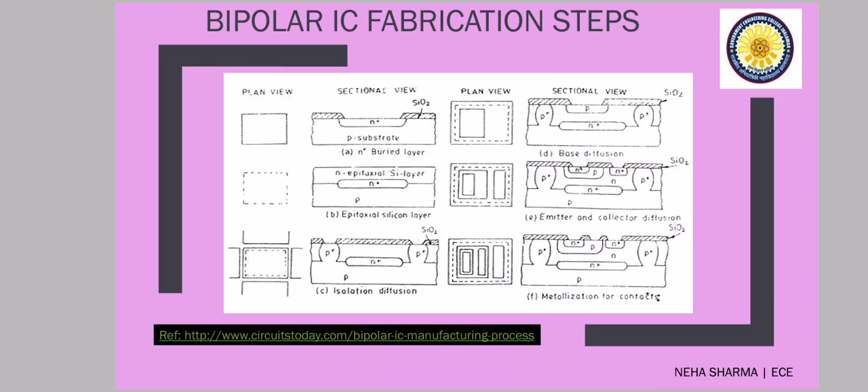So let's get started. This is a brief about the steps in bipolar IC fabrication, and I have taken this from the source Circuits Today. You can go through this website and get this information.

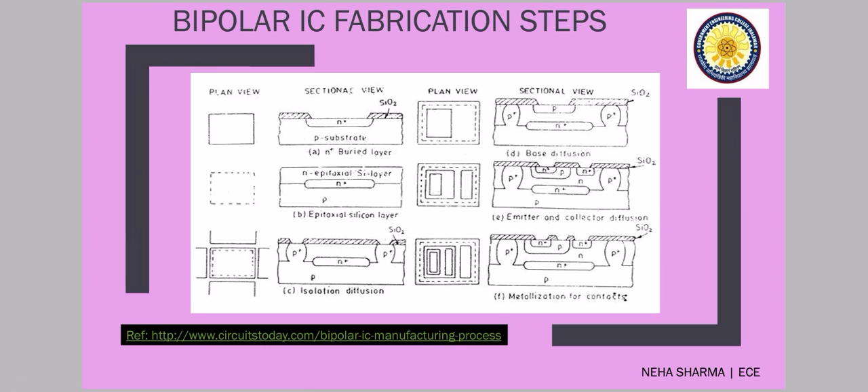You can see here it has a series of steps, starting with the p-type substrate, then buried layer, then epitaxial layer, then isolation diffusion. Here we are using junction isolation, then base diffusion, emitter, and finally metallization and passivation layer. We shall be discussing these steps in detail.

The first step is implantation of the buried layer. The starting material is a p-type single crystal silicon wafer, and on it a thin layer of SiO2 is formed. Silicon dioxide is formed on all surfaces of the p-type silicon wafer by exposing it to oxygen or water vapor in an electric furnace, meaning the oxidation process must be followed.

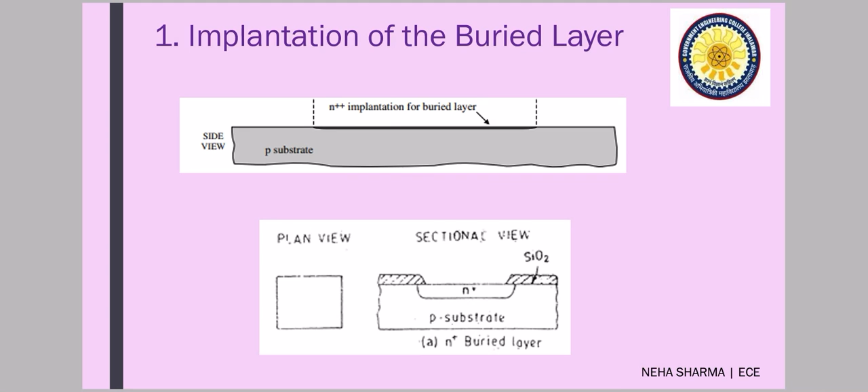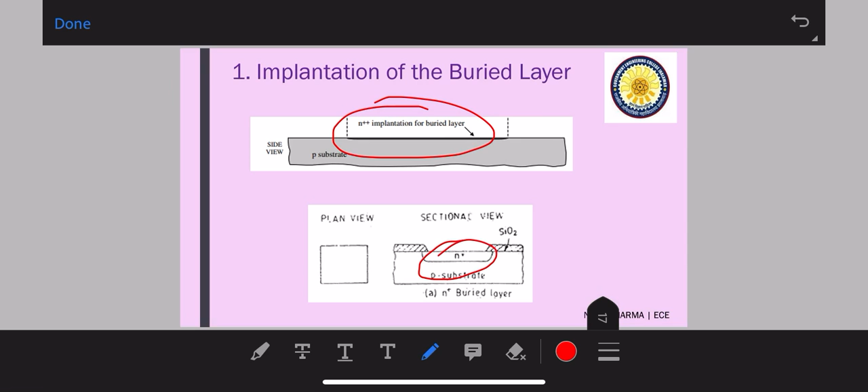The first masking step defines the area of the N plus buried layer. N plus means very highly doped buried layer, and this is also called the subcollector. As you can see in this diagram, this is the N plus buried layer, and it is very highly doped. The function of this layer is to reduce the collector resistance of the transistor.

The SiO2 is removed in these areas by chemical etching. Then thermal diffusion or ion implantation forms the desired heavily doped N-type, that is N plus buried layer region. The resulting structure is shown in the diagrams - I have given both the side view and the plan view.

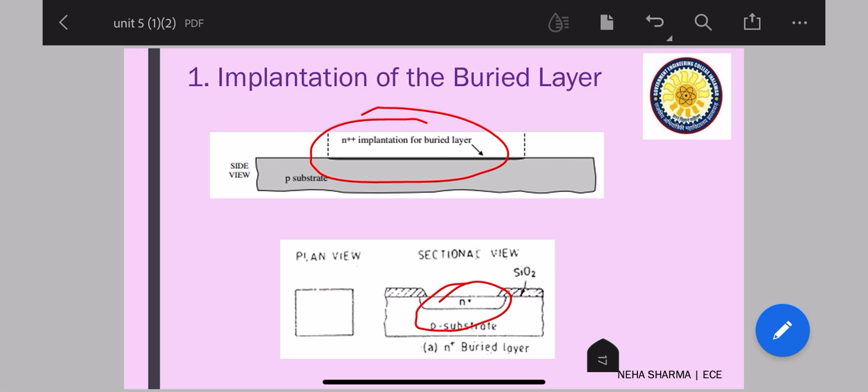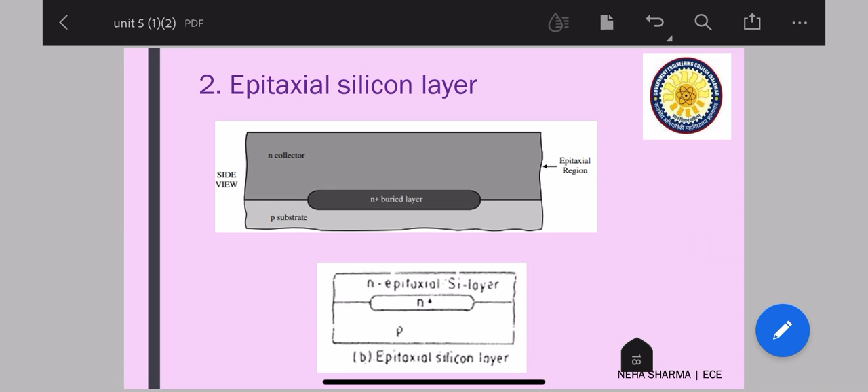In the next step, we go for the epitaxial process. The silicon dioxide masking layer is removed and the whole silicon area is exposed. By epitaxial deposition, an N-type layer is grown. This N-type layer is grown and is the epitaxial layer which will later become the collector of our BJT.

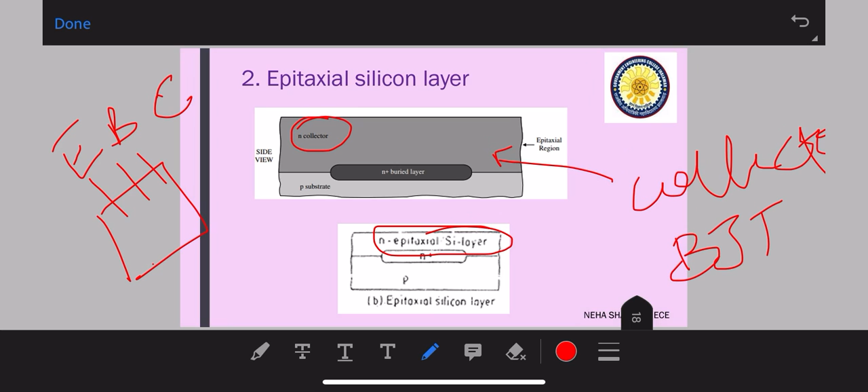In a BJT, as we know, we have three terminals: emitter, base and collector. So the first thing being fabricated is the collector region. It is grown by epitaxial process. During this epitaxial process, the N-type dopant previously introduced in the buried layer areas diffuses in all directions - you can see it covering the whole region.

Moving on to the next step, we go for junction isolation. Here, the wafer with the epitaxial layer is then oxidized at an elevated temperature in an H2O ambient, that is a water ambient, meaning wet oxidation is happening. This forms a layer of silicon dioxide of appropriate thickness, about 0.5 micrometers.

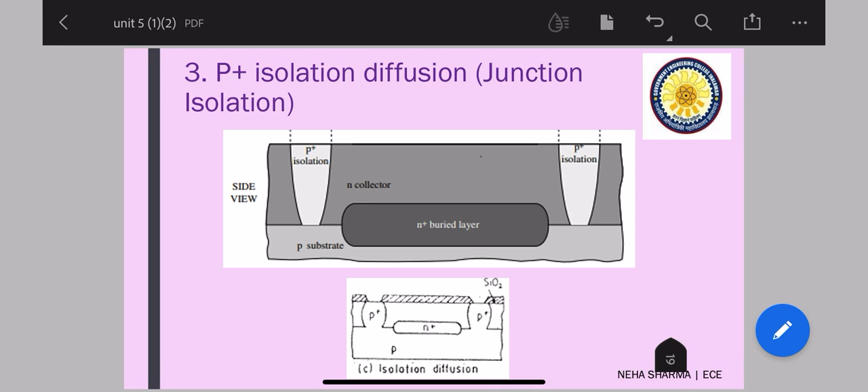A second masking layer step defines a border completely enclosing N-type islands of silicon that are to be electrically isolated collectors of the transistor. As you can see, these SiO2 islands are grown here, and the region below that we will leave. So this SiO2 patterning and etching we will do, and then this region is left here for your isolation.

P-type diffusion into the border areas is continued until the entire epitaxial layer has been penetrated, since it has to be penetrated quite deep. So that diffusion process will continue until this is achieved.

Thus, islands of N-type silicon are bounded on all sides by p-type silicon. Isolation is achieved by applying voltages such that this p-n junction is always reverse biased, as to ensure the junction isolation. For this p-type diffusion, we will be taking boron as the impurity.

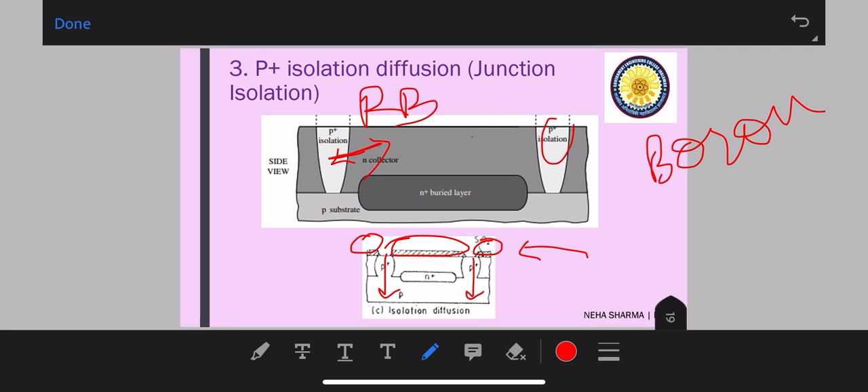A new layer of thermal oxide is grown over the isolation areas. By this process we will get the junction isolation, with two junctions of p plus isolation.

Next we are moving towards making your base region. The third masking step defines the base region of your NPN transistors. The pattern of resistors are formed simultaneously in separated isolated n-type regions. Again, boron is used here for your p-base.

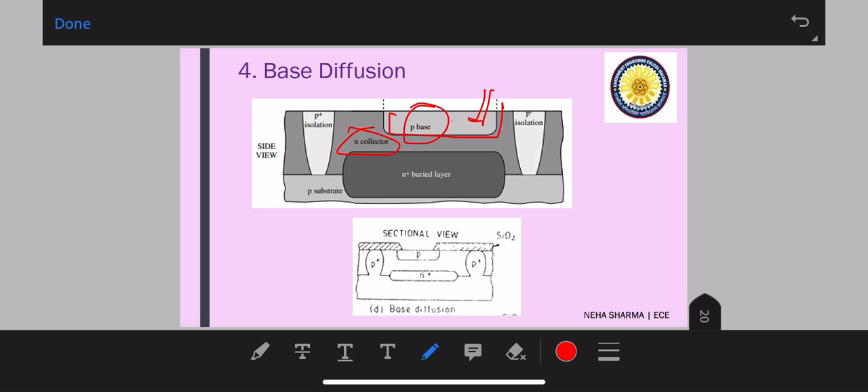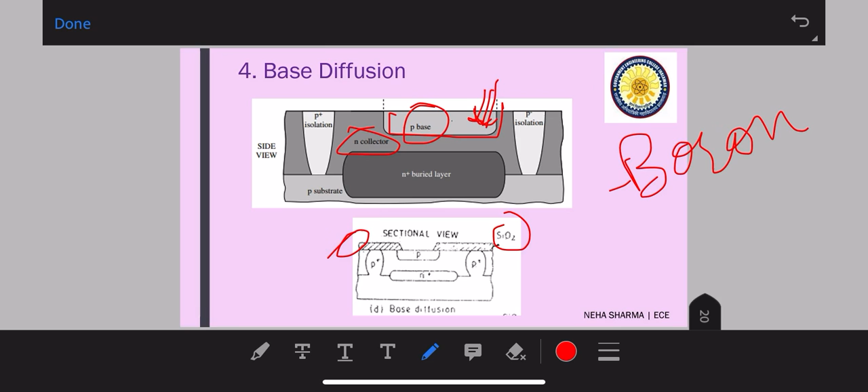So this is the final structure we are getting. The n-type collector is converted to p-type when the density of your p-type impurities exceeds that of your n-type impurities. When this condition is met, we get this p-type base structure inside your n-collector. You can see here this SiO2 layer in this diagram is just to give an explanation about masking and patterning, so the SiO2 layer is shown placed over it.

Moving on, collector is done, base is done. Now the next terminal we need is emitter. The fourth photolithographic step defines n-type transistor emitters and n-type regions for low resistance contacts to your collector. We have to make contacts on the collector as well.

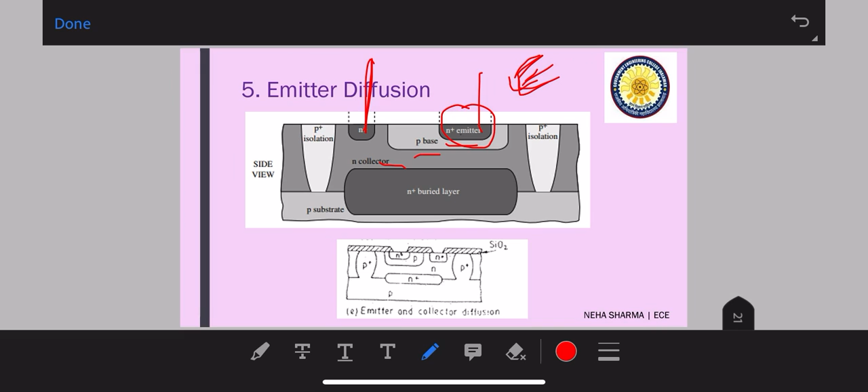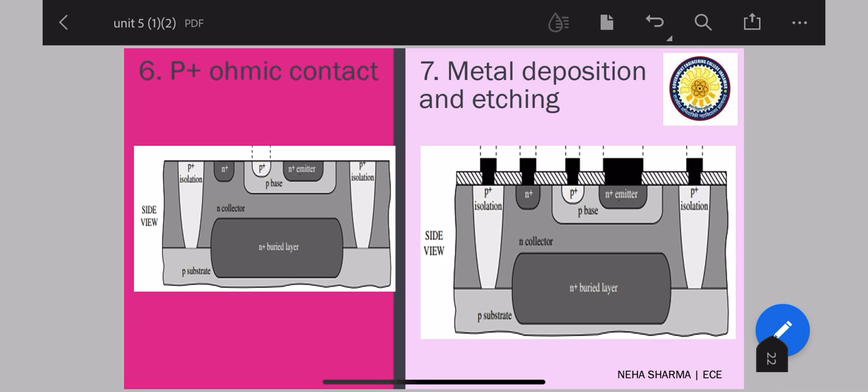Moving on to the next is your p-plus ohmic contacts. The base is made, but for it to have very low resistance, we will do p-plus diffusion here as well. You can see here the emitter terminal has come.

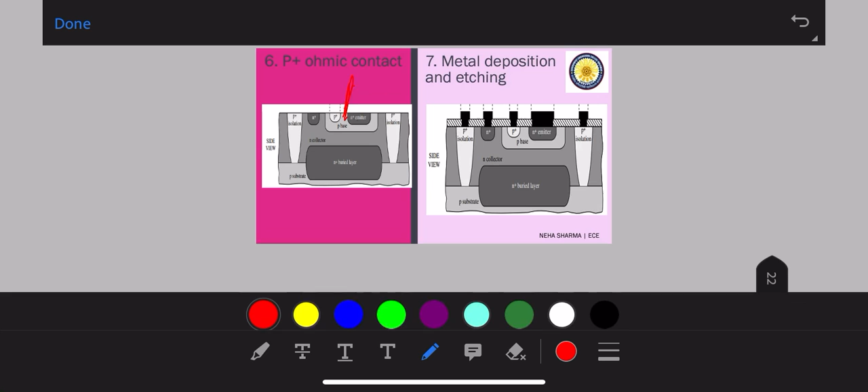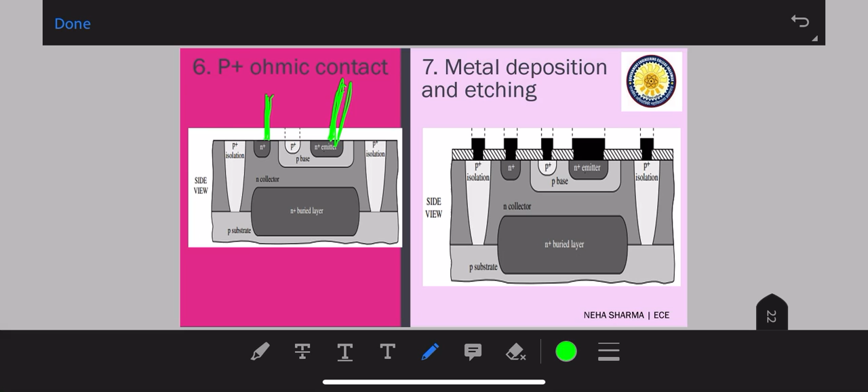This is your emitter terminal, this is your collector terminal, and here is your base terminal. So you can see here this is NPN - emitter, base and collector. So in another step we have to make metal deposition and etching to make the contacts.

For this we are using aluminum contacts. So an oxide is again thermally grown over the entire wafer, and via photolithography, those regions where contact is to be made to the silicon are defined. You can see here this layer is of SiO2.

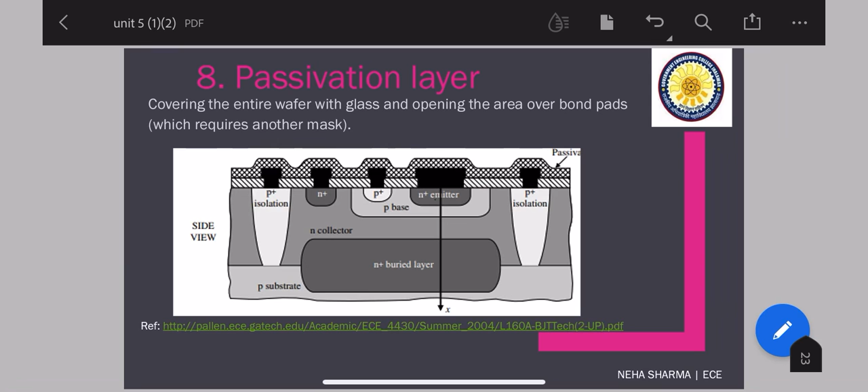So finally it will be connected - the final bonds of your final IC, whatever connection it has with the outside environment, is through these bond pads, these connections.

So the chip is then tested using a set of test vectors which consists of a sequence of input voltages and stimuli and expected output. Finally, the chip's testing is done, and then it will go through a series of testings, and then finally when it is giving all the correct results, it will go for further processing. So this is for your BJT, and thanks for today.